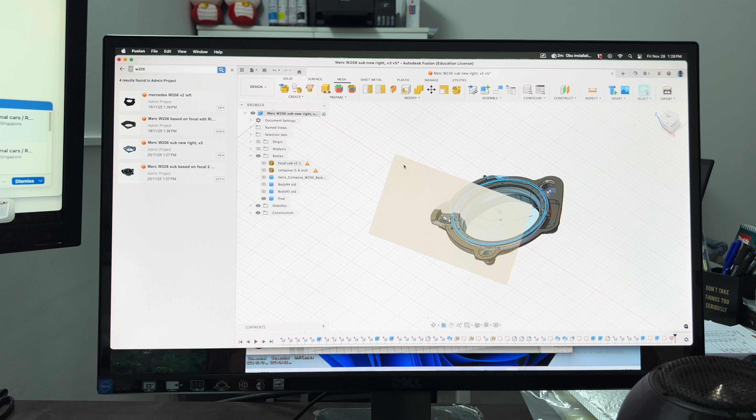I'm going to show you how we usually design our ports. We can do it in about 5 minutes. It's pretty simple. So firstly, in Fusion 360, go to the new design tab, then do a sketch.

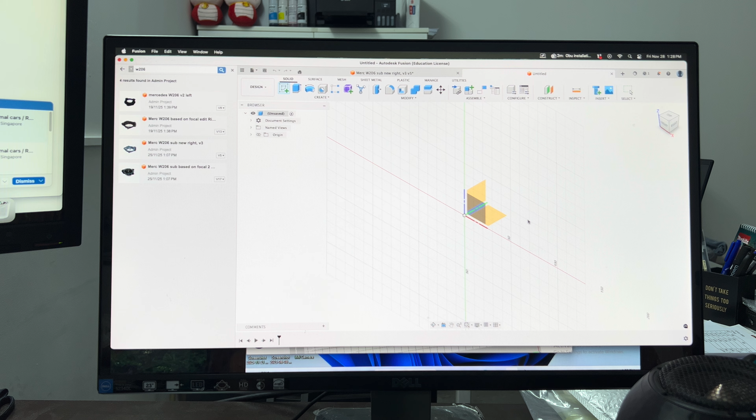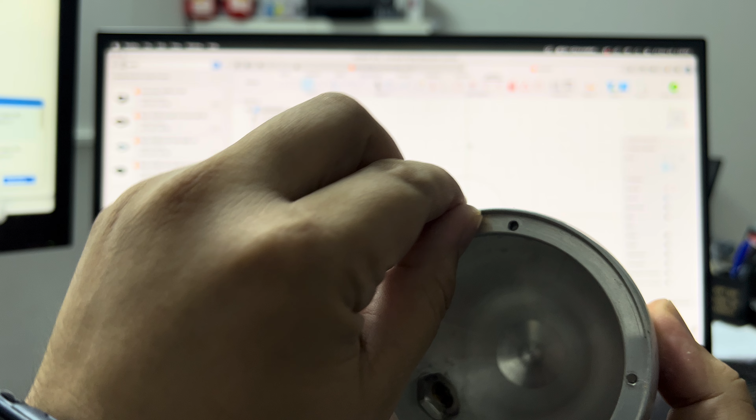Let's say I'm going to put it at the bottom. So start by drawing the area. That means if you want to have this area, let's say it's 88 mm, right? That is for a Focal KX3 speaker, 88 mm for this area.

But you need to bear in mind there is like a 2mm or 1mm allowance for the outer circumference, the outer area. So 88 plus 2 means we are talking about 90. If you enlarge it slightly bigger, the fit will be 0.05. So in total, to fit this, 88 is the speaker, and if you add 0.05 for the speaker to fit in, that is the speaker allowance you need to have for your port.

Then if you're wrapping with Alcantara or paint, you need to give more tolerance because the cloth takes up about 1mm of space. So if you want to wrap it with cloth, you add in 1mm.

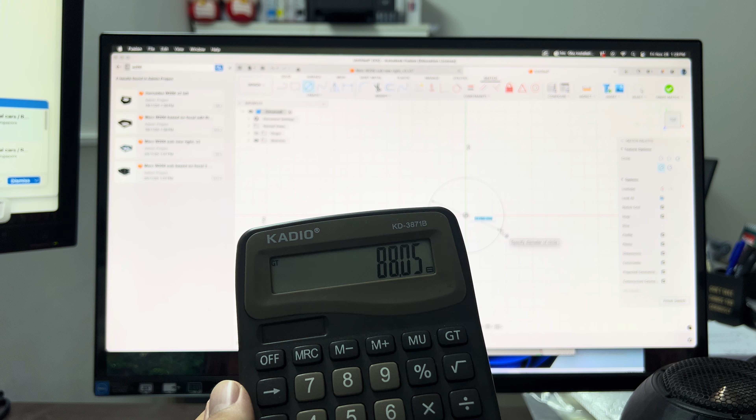If you don't want that and just want to polish and go with some lacquer, then you can just stick with 88.05. Then for the outer, left and right, you can do about 1mm each side - you can see on your ruler, it's more or less this small little piece on each side. So basically you just add 2mm to it.

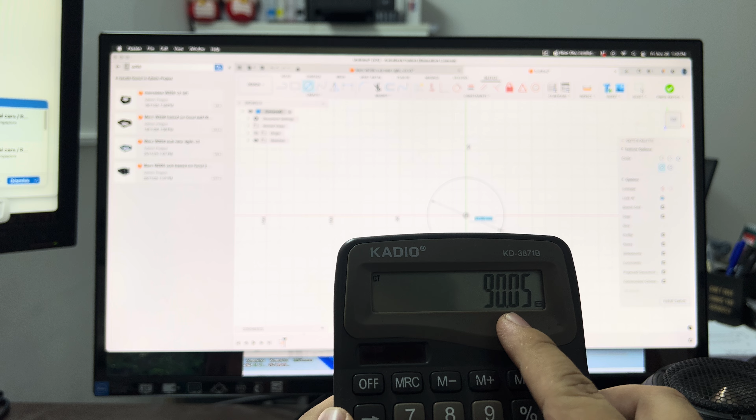So we are targeting 90.05. Here we go, 90.05. So this is what we need.

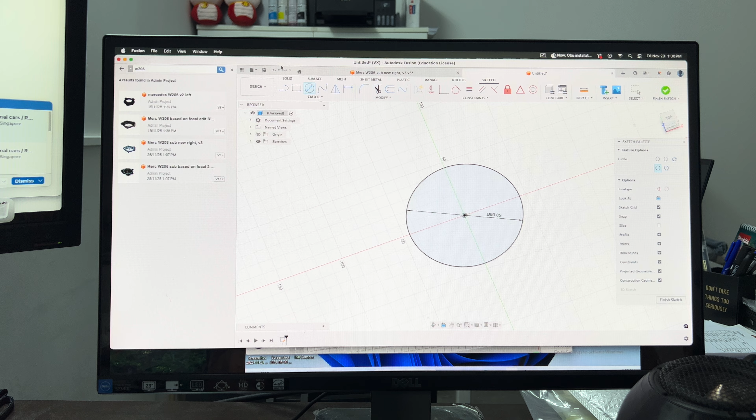So we're gonna do an extrude. How much are we gonna extrude? It's about 95, because we count the port as about 95 - that means from here to here is about 95. So we go with 95, and then next we're gonna do another sketch on another axis.

So on this axis, this is what we're gonna do. Assuming this is the top or the bottom, it doesn't matter, as long as when you draw, thereafter you can control it. First point is this point. Second point is when you zoom in right here - from here you can dictate the shape, the side, how sharp you want it to be. It depends on this. So what we are drawing is this portion.

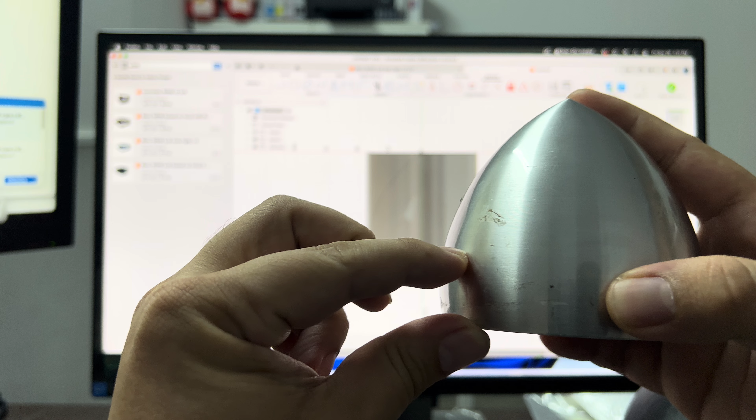So for example, if the speaker requires some form of straightness here - because some speakers are pretty deep, when you go pretty deep, this area will have an issue. So you want to avoid this.

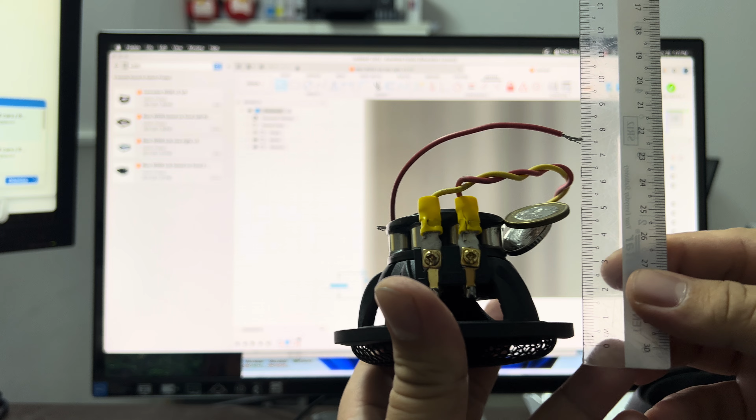So what you can do is beforehand draw some guideline from here. Let's say some speakers have this portion you need to account for. You can use a ruler, and then count - like maybe for this speaker I want it straight for at least 10mm, 1cm. So you put 10mm right here - this is the area I want to be straight regardless.

Then after that, you draw an arc right here. When you draw the arc, you just have to connect it to the center of here. So how straight or how sharp the port is, you can actually control here. Roughly like this should be fine.

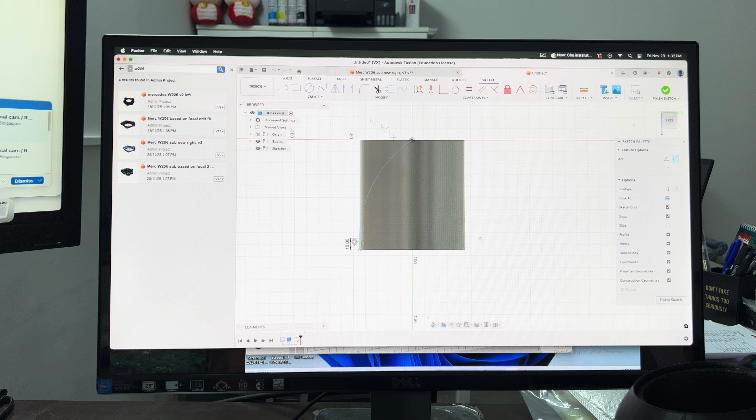Then next you want to draw just a square around this - it's very simple, like this. Now when you're done with this drawing and the sketch, you try to go to create sweep.

When you create a sweep, select this, select the path to be around the circle. So you can see they actually cut out this whole piece right here, right?

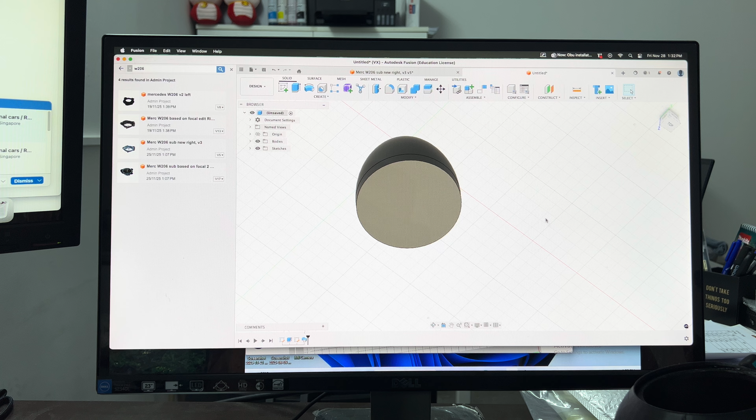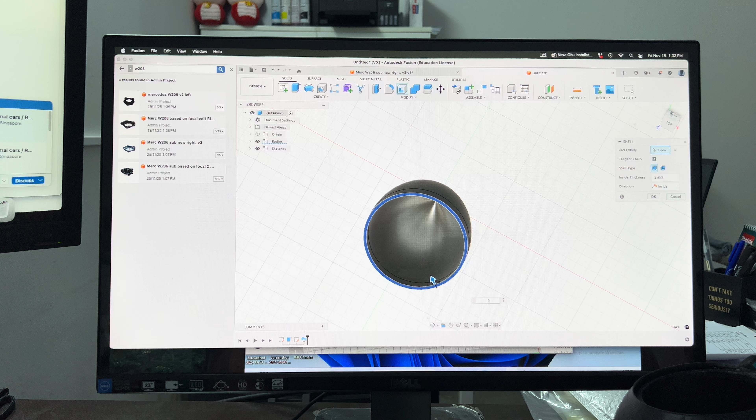So next, what can you do? You can actually do a shell. That means if your customer requires 2 mm thickness in the shell, you can do 2 mm thickness, or if you want more, you can do like a 3 mm thickness if it's thicker, or 4 or 5, you can see that the thickness varies. So usually we go by 2 mm. So if you go by 2 mm thickness, you can see the pot is more or less finished.

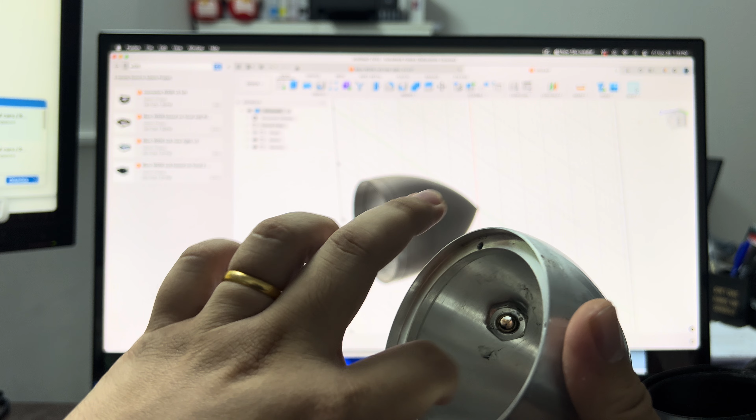This is as per design in the older days. We use this pot, right? So how to create the inner ring? Inner ring is pretty simple. You just have to construct a surface here, right here.

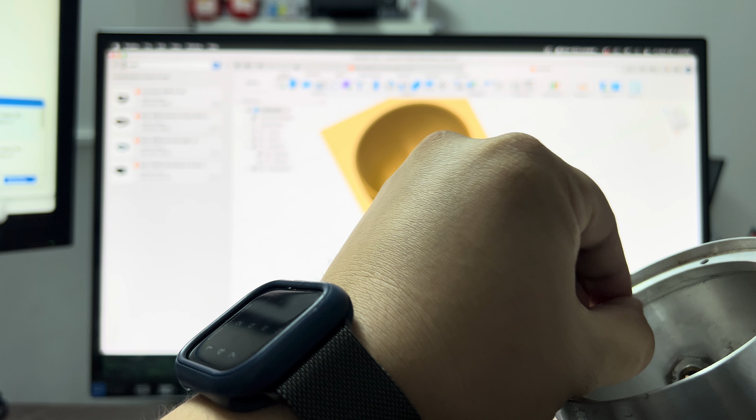So from here, you could actually either use the old sketch, or you can redraw. In my case, I'm just going to use the old sketch, because I don't want to have any alignment issues. In the inner area of this portion, if you notice, it is always more or less 5 mm thickness. So if it's 5 mm, we're going to draw a ring 5 mm for this speaker itself. So what we're going to do is, because this is the outer ring, we will alter this.

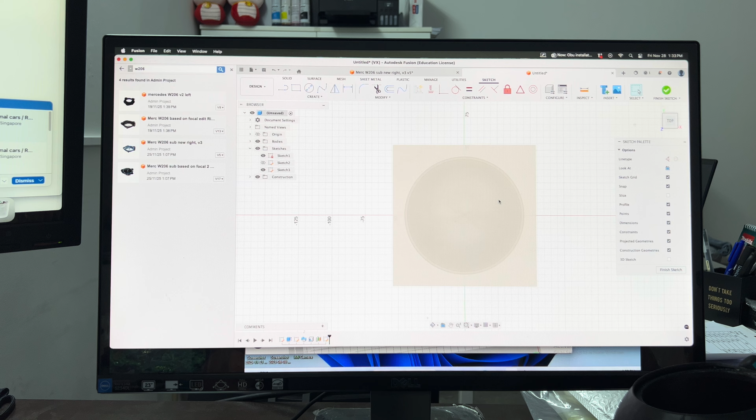Sorry, I'm going to end sketch. I don't want to create this sketch. I am going to delete this. I am coming here to edit the sketch, so add another circle, which is for the inner speaker.

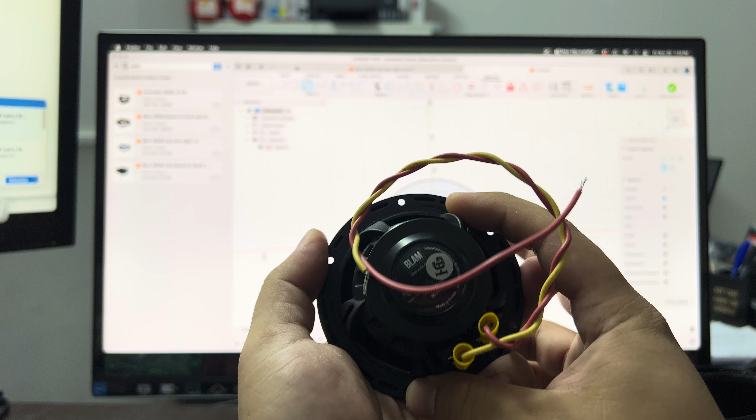So sometimes if you look at the speakers, they will have this area that you want to avoid, so it sits in nicely. If you have the diagram, you can use the diagram. If you do not have the diagram, use a caliper to measure. If you do not have a caliper and you do not have the diagram, then you have to do a bit of guesswork. So in this case, I'm just guessing, maybe it is 70.

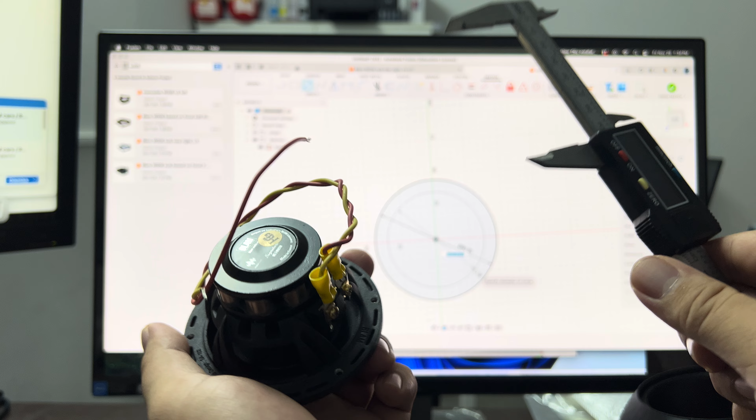I'm just going to use a caliper to do a measurement, a rough quick one. So if I want this speaker to fit in nicely, it's going to be 72. I'm going to do like 73 mm inner, 73.3 mm. So this is the internal cutout that I need to have, and it's going to be 5 mm thick.

So when I do a finished sketch, you can actually do an extrude on this ring. I want this ring to be up here, so you can actually do an offset, then you can do like a 10 mm. Here it is how thick it is.

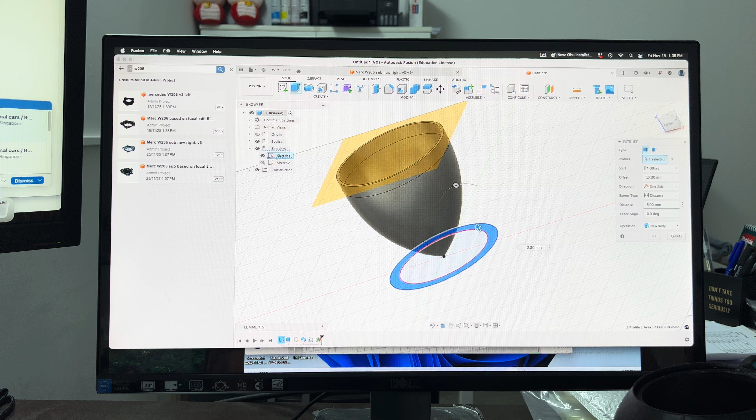Let's say I want it to be 5 mm. Then if I want it to be slightly higher, I can do like 40, and you can see it goes up already. 60, okay, maybe 70, 80, 90 is a bit over.

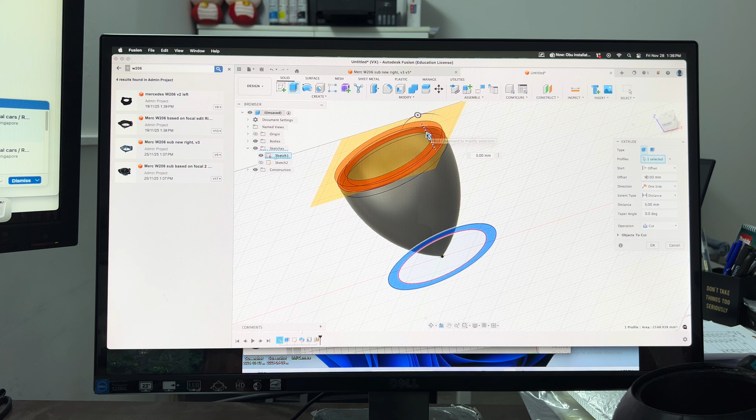So because this ring, this whole thing is 95, if I need it to be recessed properly, I need to know how much this is. This is about 5 mm, so I need to leave 5 mm. So 95 minus 5 mm will be 90, so the actual should be 90. And then because this is extruding up, if I go it down minus 5 mm, and I put a cut, you can see that we actually successfully created an inner ring within the sphere that we created.

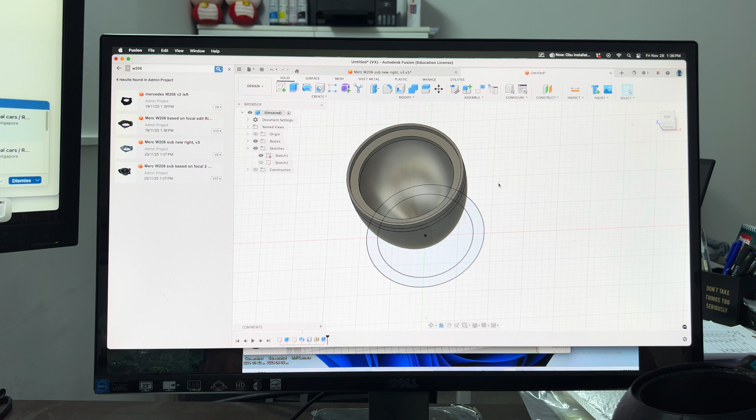You could actually do it without a surface, and then you do it with this. Then next will be creating either the screw holes, or if you don't want to do screw holes, you can do a screw tab. So it depends on how you want to draw it. Importantly, check the data sheet for how big the speaker is, and leave a 0.05 mm gap in between, and then from there you'll be able to complete this drawing. Simple.